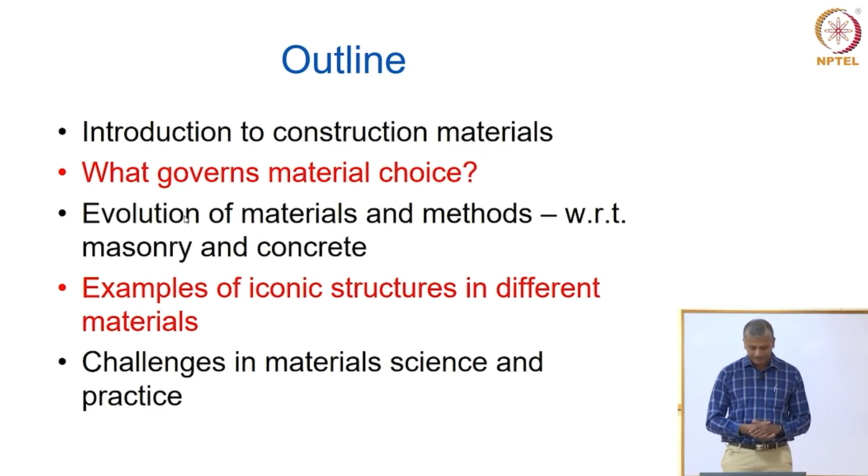There are several different types of civil engineering materials available today. Common ones being steel, concrete, asphalt, wood, polymers and plastics. You have other metals like aluminum and copper which are also used in construction. And today we are talking a lot about using composite materials, which was earlier used in aeronautical and mechanical engineering, but today we also use composite materials in civil engineering.

You've observed quite a bit that concrete apparently looks to be the material that is most widely used, right? In fact, it's the second most consumed material in the world. After what is the first most consumed material?

Soil, well, if you consider soil as a construction material, yes, we use a lot of soil in construction. But somebody said the right answer before. Water, yeah, water. Concrete is a material that is consumed in quantities second only to water.

Significantly large content of water is consumed for several things, including construction, but concrete is the second most consumed material. Apparently we are using about 25 billion tons of concrete every year, as per the last estimate. And it's only bound to go up because in countries like India, several African countries, and several other Asian countries, there's a lot more work that needs to be done regarding development of infrastructure, and that's where concrete is going to be used more and more.

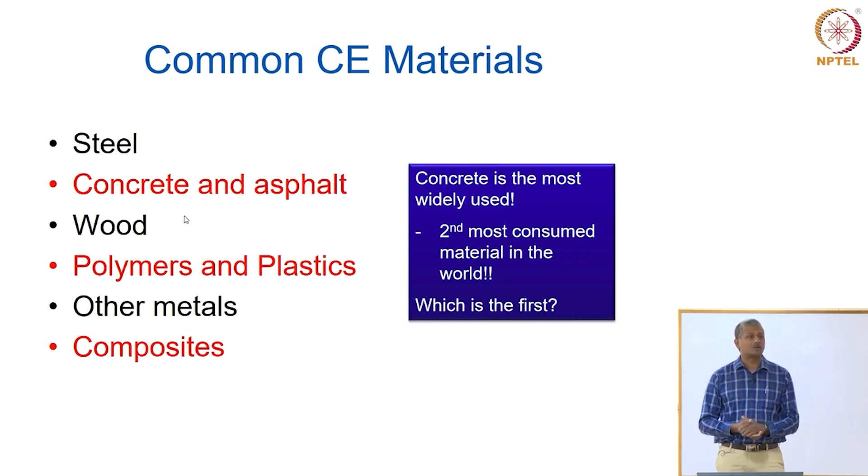So obviously there's a heavy burden that we are placing on the environment, and these are some of the aspects we'll look at towards the end when we look at the challenges as far as material study is concerned. For now, let's look at why we want to study materials. I mean, they are available, let's just use them, right? But there are several different aspects why we want to engage in a deeper understanding of material characteristics in order to make our construction more appropriate and more sustainable, more durable in the long term.

The idea is to improve the quality of existing materials and enhance the performance and service life. Later when you learn other aspects of engineering, you learn about service life being one of the controlling factors which governs the choice of a given material, construction product, or process. Service life essentially deals with how long the material or structure is able to withstand its given environment without losing the quality with which it is actually performing.

The other aspect is we always want to look for new materials, primarily looking at cost effectiveness and materials that are durable and long lasting. That's another aspect why we want to understand materials deeper from a scientific point of view.

Utilization of waste today is turning out to be quite a big challenge because we have to extensively dispose a lot of waste generated from different types of industries. In many cases, construction is a scenario where we can actually utilize many of these waste products, but not just by putting waste in the material and expecting it to perform—rather, a lot of this waste can actually end up being a value added resource to construction materials and projects.

Waste utilization is another aspect of why we want to study materials and understand their effect on existing construction materials. We also have ailing infrastructure that's getting old. We need to understand how materials degrade with time, so we can decide on appropriate strategies for repair and rehabilitation to prolong the service of these existing structures.

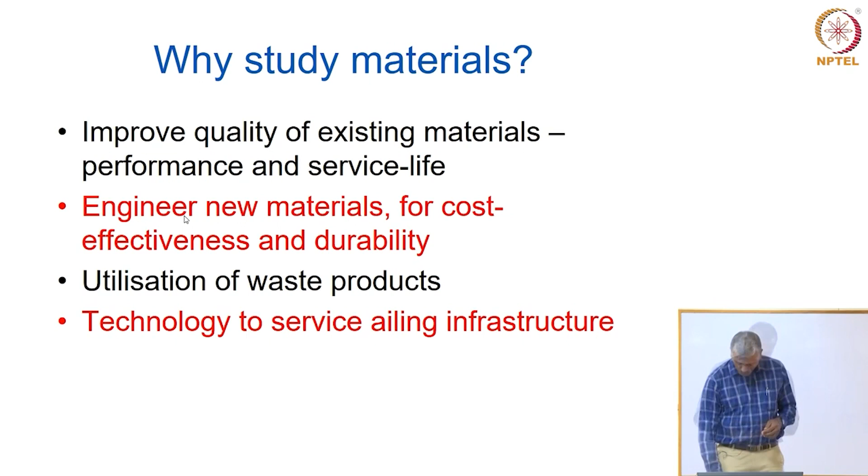There are several factors that govern or influence the choice of materials. First and foremost, depending on the type of application, what exactly you are constructing, what material is locally available and available at a cost-effective price. Cost should be low and the material should be available aplenty locally—that's probably the most important factor for choice of material.

Of course, in certain areas the climate will govern the choice of material. For example, in northern European countries where very little daylight is available most of the time, you could use glass as a major construction material because it allows in a lot more light. But unfortunately, in India we also started copying the Western use of glass, and most of our IT buildings and structures have come up with glass facades completely enveloping the building.

What is the problem with using glass in a climate like ours? It brings a lot more heat into the structure, and because of that we spend a lot more energy trying to air condition the buildings. So we're sort of losing the battle when we choose materials and technologies that aren't really apt for an environment. Climate is one of the deciding factors in choosing a particular material for a certain location.

The other aspect is the performance requirements—what exactly do we want this material to do, what kind of engineering characteristics are expected from this type of material. That is the performance requirement.

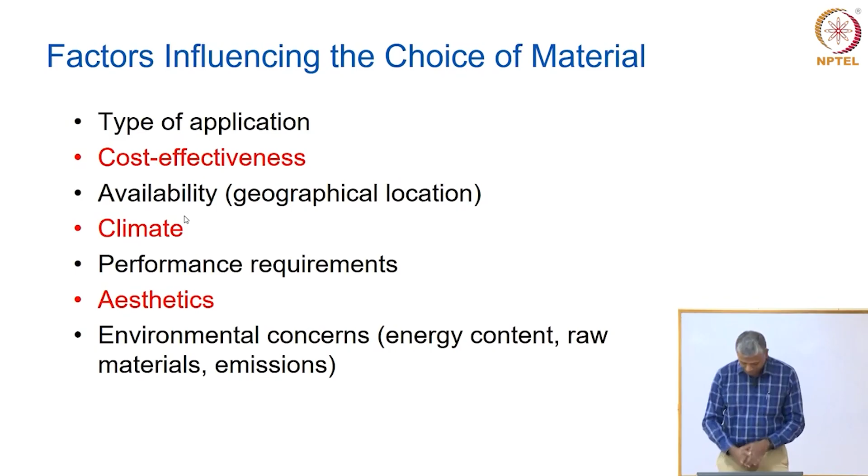So let us look at how materials and methods have evolved over the years. This is a historical process, though not probably entirely accurate in how I've depicted the different materials and processes. The idea was to give you a comprehensive glimpse of what types of construction materials and processes have actually been undertaken by engineers to build different structures.

We have monolithic construction, probably the oldest variety, where people simply built by carving rock. The caves are the earliest example of a dwelling as far as human civilization is concerned, and these caves were actually built into existing mountains by drilling and knocking things down, making a space for yourself inside—just to create a safe space for yourself.

Later on, people realized they had to work with smaller blocks of material so they could construct in a much grander fashion, because you can only do so much with monolithic construction—you can't really go beyond a certain scale. So they started looking at smaller blocks, assembling these blocks in various shapes and sizes, and that is what we call masonry.

Around the same time, wood was also quite prevalent in areas where good quality wood for construction was available, and wood as a construction material probably dates back as long as masonry has been used. Later on, we entered the era of concrete, and people started realizing that you could optimize further by combining different types of materials to give certain very interesting characteristics.

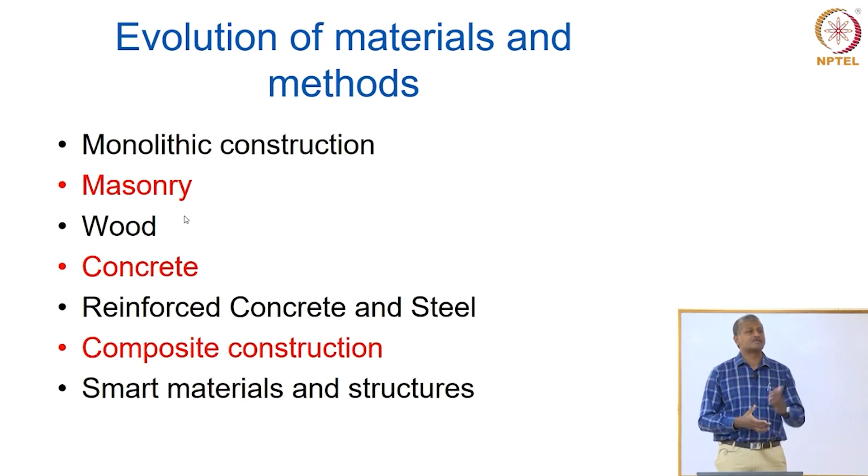All right, so some examples here of monolithic construction. This is all too familiar for you. The figure on the right, can anybody tell me where that's from?

It's from Hampi, as it says on the slide. It's basically a chariot which is carved out of a single rock. On the left you see another picture from Ellora, where again from a single rock you've carved out an entire temple.

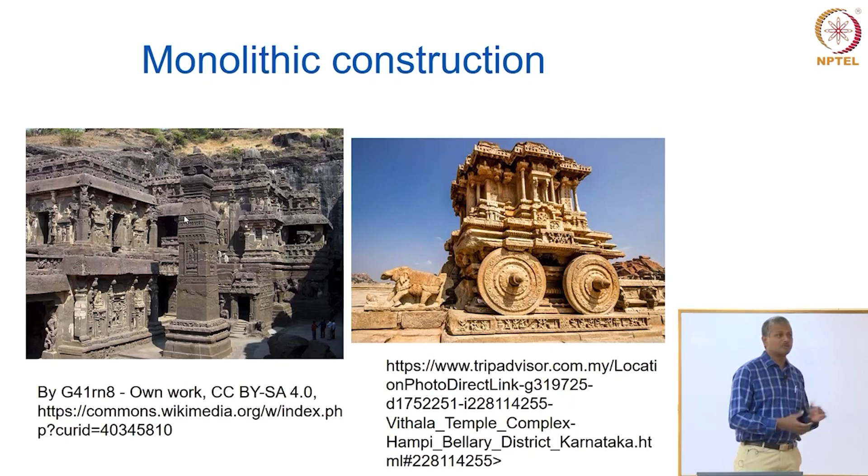As you move forward towards masonry, the simplest examples are the dry stacked masonry. You just take blocks and keep them on top of one another, and how is it stable? Because of gravity, because of sheer mass.

You use really massive components, and as you go to the top of the structure, you keep reducing their size. Like the Great Pyramids of Egypt, which are essentially dry stacked limestone blocks kept on top of each other, ultimately resulting in a massive structure that even today is a fairly significant landmark in the world.

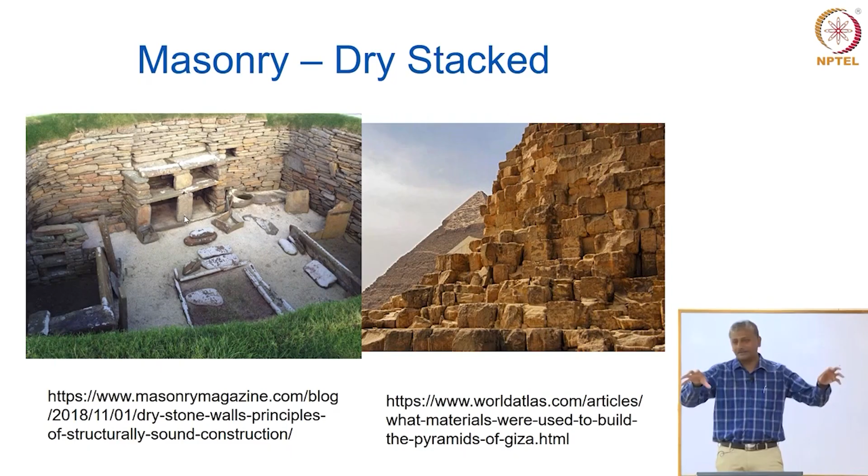But moving on, people thought this was not really the best way forward. Let's look at ways to join these blocks so we can work with smaller blocks that people can carry quite easily, and that's where jointed masonry started being practiced. Jointed masonry is even practiced today. The only thing changing in jointed masonry is the type of cementing material used to bind these blocks together.

In the past, there were several other examples of binding materials. I'll come to that part a little later. Today, of course, we only think of cement as the only possibility for joining masonry blocks.

So these are some examples. On the left, you have a brick masonry structure, and on the right, a stone masonry structure. Both have very fine detailing work done with the joints, giving a very nice appearance to the entire structure.

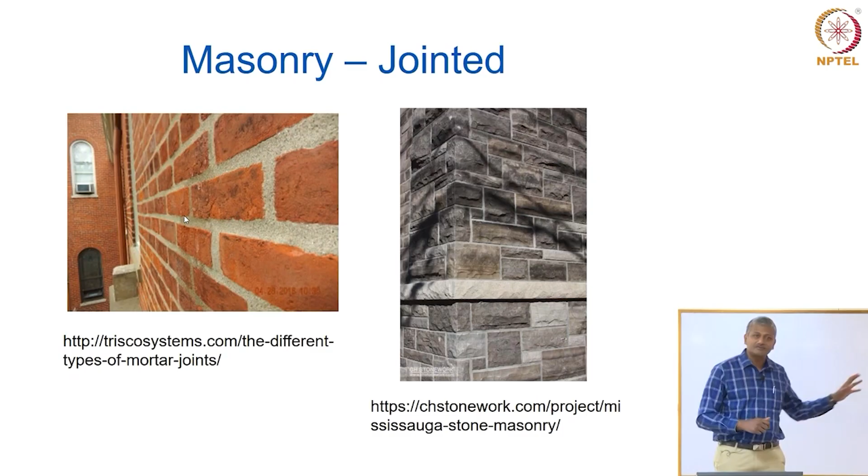Moving on from jointed masonry, you can actually get a lot more optimization with the speed of construction. Please remember, when doing a jointing process in a masonry block, you are placing one layer of masonry, then placing cement mortar or lime mortar on top, the binding material, then putting the next layer on.

But you can't keep doing this entire process in a single day. You need to wait for the material to harden, otherwise the wall will become unstable and fall. Because of that, the use of mortar for joining blocks is a process that actually slows down the construction work significantly.

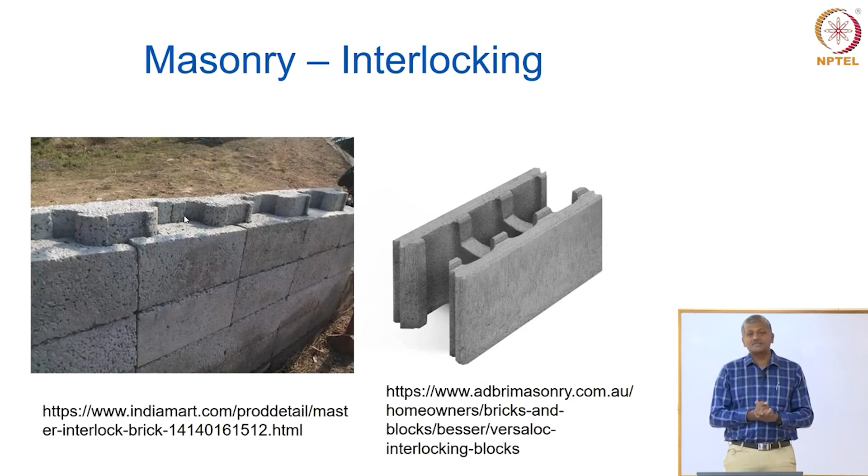The way around needing more mortar is to ensure good stability by providing interlocking between your blocks. This is something you know from childhood—like playing with Lego or other building blocks that connect because of their interlocking capabilities. Such interlocking blocks lead to construction that can be done much faster than jointed masonry.

From interlocking, people got the idea that you can strengthen masonry structures even better by putting reinforcement inside the structure. The need for providing additional strength to masonry comes in when we look at the performance of masonry in disaster events like earthquakes.

In earthquakes, the structure has a motion that moves along with the ground. In such cases, just having good strength in the axial direction isn't enough—you need some load carrying ability that can take loads in the lateral direction. Providing reinforcement can go a long way in extending the load carrying ability of your masonry, so reinforcements became the next step in the development of masonry structures.

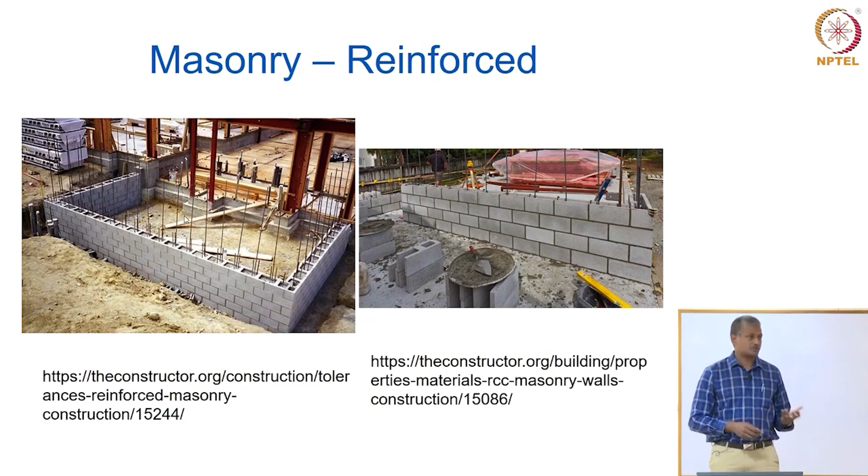This involved providing certain cavities within the masonry and putting a reinforcement rod, like the iron or steel rod typically used with concrete, to provide lateral resistance. Reinforced masonry was the next step forward from jointed and interlocking masonry. But coming back to jointed masonry, the primary reason people went for this was that they discovered combinations of materials with very good binding characteristics, which could join these masonry blocks together.

This binding characteristic is made possible by different cementing materials. In past structures of the Babylonians and Assyrians, a lot of burnt bricks and alabaster were cemented using bitumen. Today bitumen is used to pave roads, but the same material was earlier found in natural pools. You know the process of formation of bitumen, right?

It's formed from the distillation of petroleum or crude oil. You get several products like gasoline and kerosene, and what remains as residue is asphalt. This asphalt also occurs in naturally occurring pools around the world, and people were able to extract it and use it as a binder to bind masonry blocks together. So that became the first binding material used for masonry.

Later in Egypt, people started using burnt gypsum based cementing material—like plaster of Paris, which you may have used in school as a molding material. When you mix plaster of Paris with water, it hardens because it converts to gypsum. Plaster of Paris is calcium sulfate half H2O; when you add water, it becomes calcium sulfate 2H2O, causing it to harden. This was again a very popular binding material used in the past.

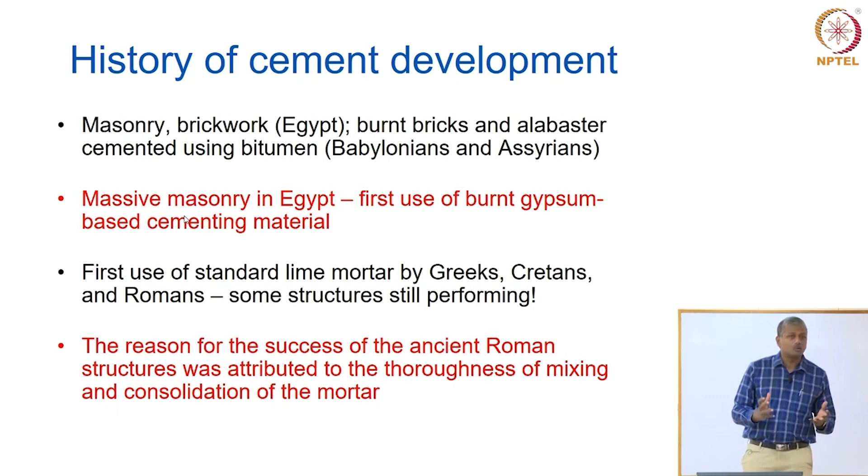In India also, there are several evidences from the past where lime was actually mixed with other additives like ground brick, for instance. The brick itself, when you grind it into a red powder, enhances the properties when you mix it to make the lime mortar. And that was one of the first uses of additive materials into the lime.

Later on in Greece and in Italy, they started using volcanic ash, and they saw that when you mix it with the lime, it gave much higher strength and durability properties. That is where the word pozzolana started coming into being, and even today when you buy cement, there is a brand called Portland Pozzolana cement. This pozzolana is basically anything which has a reactive silica content in it. The earliest example was the use of volcanic ash, and when you mix that with lime, it started producing a chemistry which was not seen with plain lime kind of structures.

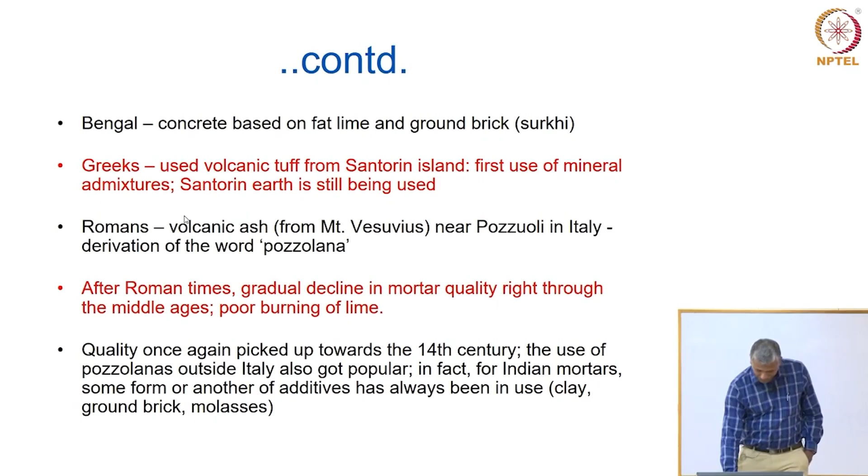Beyond that, there is not too much development that took place until about the 19th century, and the 19th century is when cement came into being. Cement basically has its origins probably much before the 19th century. We have great scientists, one of them Vicat, and Vicat is something that you will come across later when you actually do your lab class with cement, but that's not until the 5th semester. So basically Vicat essentially looked at some combination of limestone which had a lot of impurities in the form of clay in it, and he saw that when you burn this limestone and clay together, the resultant lime that you get is excellent with respect to its binding characteristics. But later people realized it's not lime that you're getting, you're actually getting something else, you're getting cement.

And the first person to realize this and understand the marketing potential was Joseph Aspdin. Although he was not the inventor per se of cement, what he did was, instead of calling it lime, he called it cement, and he gave it a special name called Portland cement. What he saw was, when this material obtained by mixing limestone and clay together reacts with water, it results in the formation of a hard rock-like substance, and this rock was similar in appearance to a type of limestone found in Dorset in the United Kingdom. So from that, Joseph Aspdin gave it the name Portland cement.

This Portland name got stuck with people, and people are still using it today, in spite of the patent having been obtained in 1824, and probably the patent went out 100 years ago maybe. The patent is no longer valid, but we still call the cement as Portland cement.

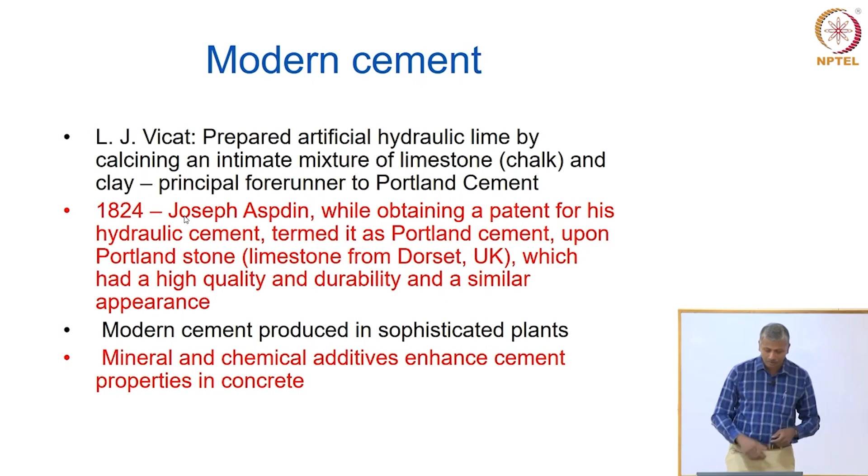Concrete as a material has been used for several years, thousands of years, but people didn't know it was called concrete earlier. Concrete is just an English word which means a mixture of different things. So we are mixing a binding material such as cement, water, sand, and stone to make the composite material called concrete.

Today we don't really have any other material which has the level of adaptability, cost effectiveness, and durability as concrete, which is why concrete is still highly popular, primarily because of cost effectiveness. You can't really build structures with the same level of load carrying ability at a reasonable cost.

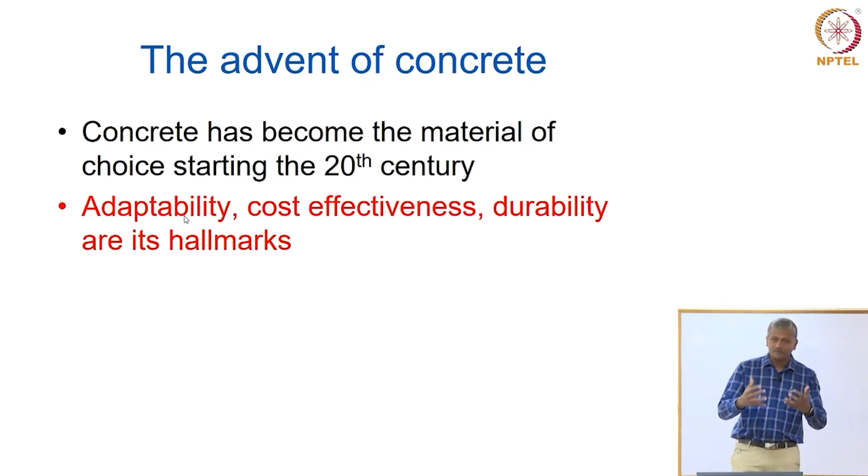But there are some limitations to building in plain concrete, because concrete as a material is excellent in compression but very poor in tension. Compression is when you are applying load onto the structure. Tension is when you are pulling the structure apart. Concrete is not very good in tension, so you need to strengthen it in tension.

That strengthening in tension basically involves either using reinforcement like steel, which is very good for tensile strength, or using structures where you can optimize the shape. In the past, people built with domes and arches. In such cases, you allow the load path so that only compression comes onto the material - there is no tension at all.

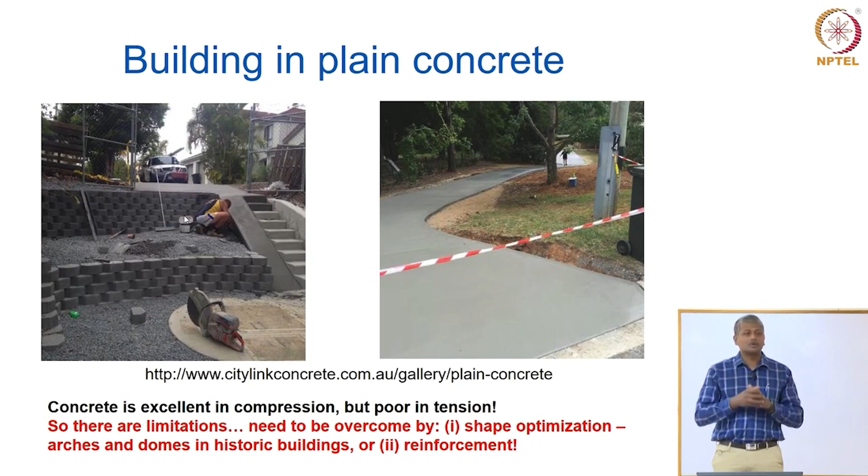For example, you may have seen pictures of these structures, the Pantheon Dome in Italy and St. Peter's Basilica in Vatican City, which have some form of lime concrete used to create these massive dome-shaped slab structures on top, with waffle-like openings to reduce overall weight, and even a circular opening in the center to allow light into the structure.

So these are concrete structures, but not the concrete that we know today. They did not use cement, because cement did not come into being until the 19th century. The Pantheon was built in the 2nd century, and St. Peter's Basilica in the 17th century. So they must have used lime with or without some additives to make the concrete, mixing lime with water, sand and stone.

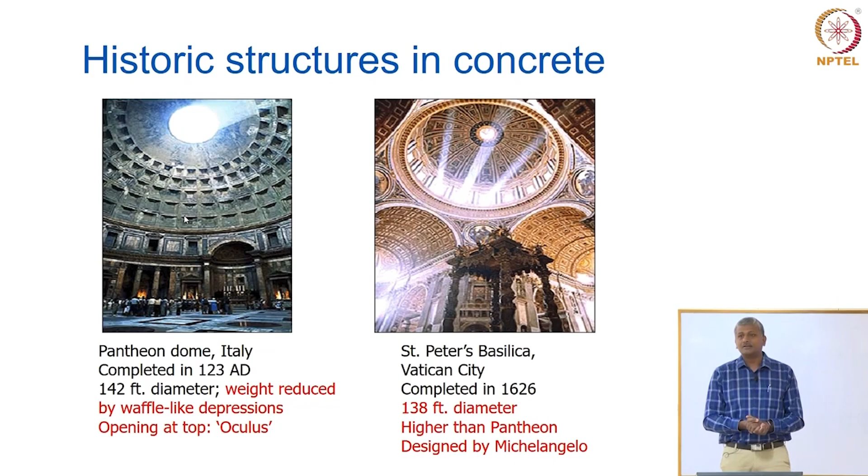With a dome or an arch, you do not really get any tension, you only have compression, so the material is able to withstand it easily. But when you go towards other forms, more rectangular forms that we're used to seeing in construction, you need to start putting steel to reinforce the concrete.

You only provide steel wherever the structure needs resistance against tensile loading. Where there is only compression, you do not have to worry about providing steel - you only provide steel where tension occurs in the reinforced concrete structure.

So reinforced concrete has given us a vast extent of possibilities which can define different types of shapes, different types of optimized uses and so on of the material combinations.

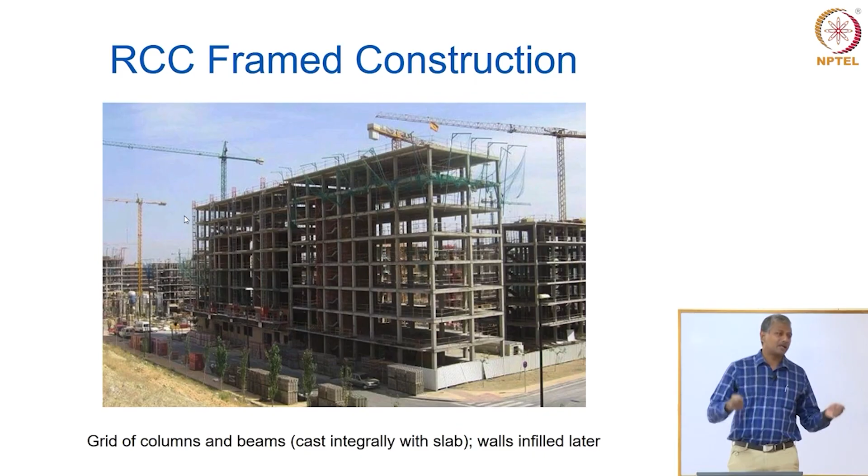But the only problem is, people realized that this is cutting down on productivity, because you make the frame, but the wall takes its own time in getting hardened and built up. So because of that, people started moving to the next stage, building walls also with solid concrete. This increased the speed at which construction could be done, because now you can have a formwork system around the entire structure. You just fill up your concrete, and as soon as some level of hardening happens, you lift up this formwork and build the next level.

This way you can go from floor to floor much faster. If you go to any of the high-rise residential buildings being constructed in the city, you will see that this is the system they adopt, where even the wall has the same concrete that goes into the column and the beam. So because now you don't need to worry about other materials, you just need to speed up your project by using the same material throughout the structure.

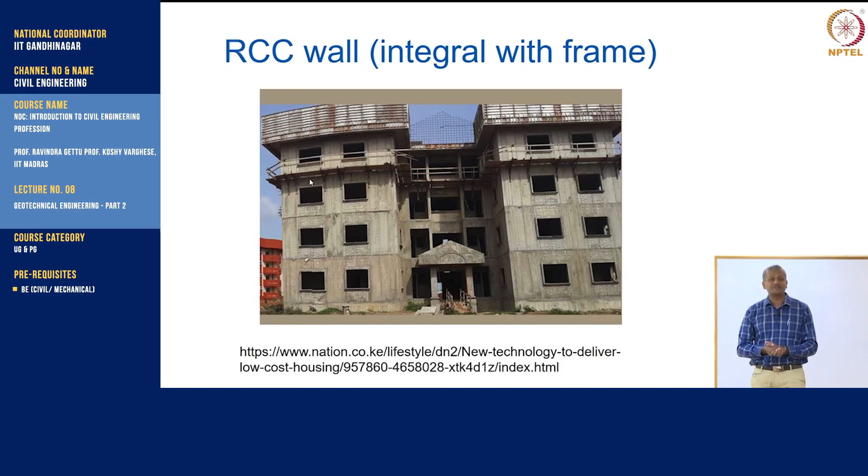Of course, there is a disadvantage here, your walls are not going to be as efficient anymore as before. Earlier, with the frame construction, you had the choice of choosing different types of materials for the wall, which could reduce the heat loading of the structure. But here, you are building everything in concrete, so it's probably not a great idea. But then, it speeds up the construction extensively, and you can now finish buildings in a matter of a few months, where earlier it would take more than a year, probably up to 2 years. The same level of building can be constructed in probably half the time.

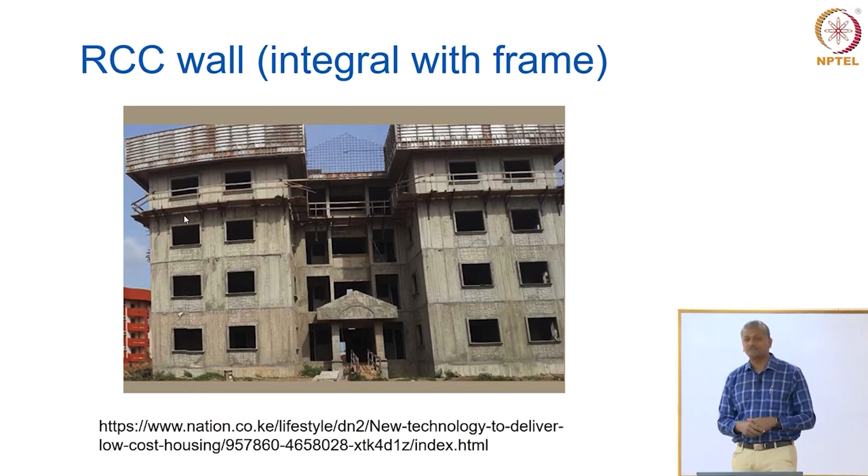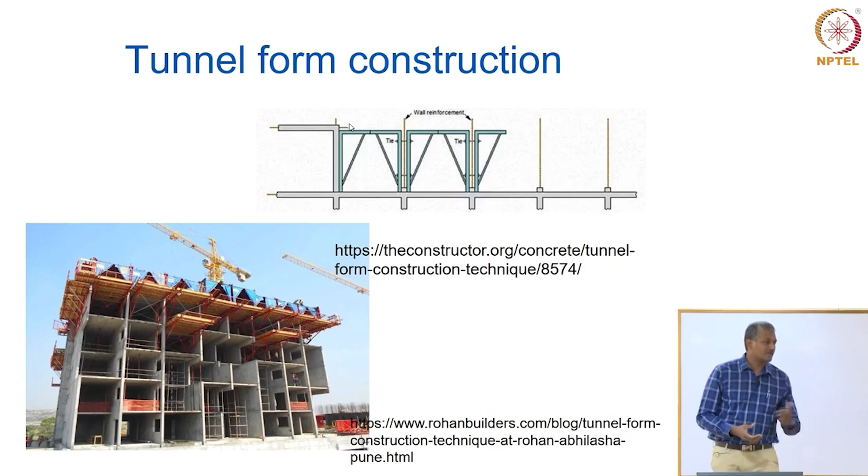Now, when you slow down your process because you need to marry steel and concrete, what you can also do is look for methodologies by which you can strengthen the concrete itself and make it respond positively against tensile loads too. This has been accomplished by the use of pre-stressed concrete. You'll learn later about what pre-stressing is and how it increases the load carrying capacity of concrete. But overall, this pre-stressed concrete belongs to a segment of concrete called precast concrete.

What is precasting? That means without really assembling or shaping the concrete on the site, I make the components of concrete in a factory, bring them to the site, and simply stitch them together. That's called precast concrete.

The obvious advantage of precast construction is that I can control the quality a lot better. I'm factory making these components. On site, there are so many different people who can actually spoil the appearance, and the workmen need not be well trained, which could spoil the final appearance of the structure. But I don't have that issue with a precast structure, where components are built at the factory, then brought to the site and simply assembled, stacked up, and connected properly.

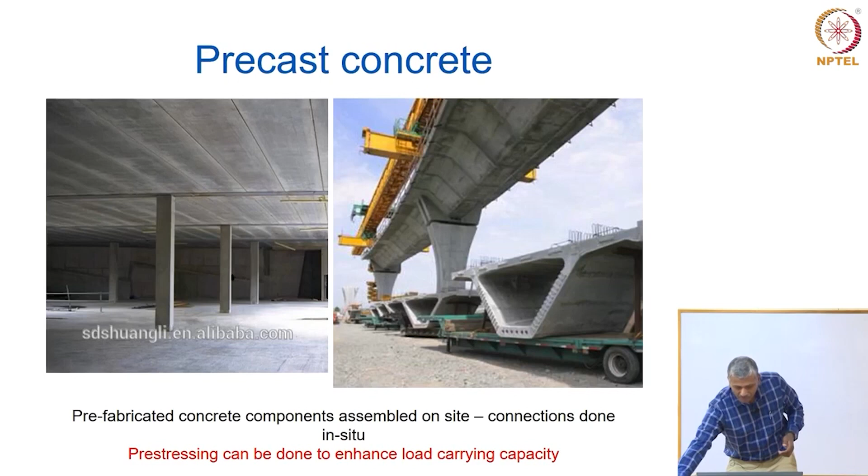What is the advantage here? In the past, when you had to make something with concrete, you had to put up formwork, as I showed you in one of the previous pictures—this formwork that you have on the side.

It is estimated that formwork takes up nearly 20 to 30% of the cost of construction, and nearly 60% of the time it takes to build a concrete structure. Why does it take so long? Because it has to be assembled, and after the concrete hardens, it needs to be disassembled. That time can really eat into the productivity of your entire project.

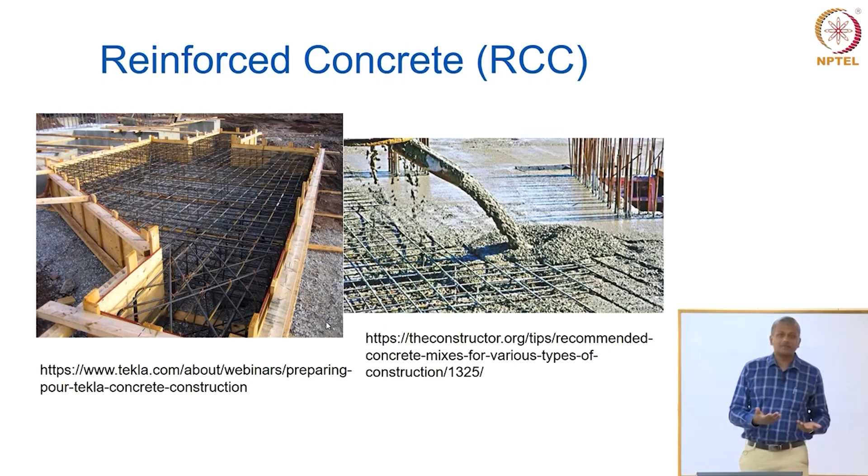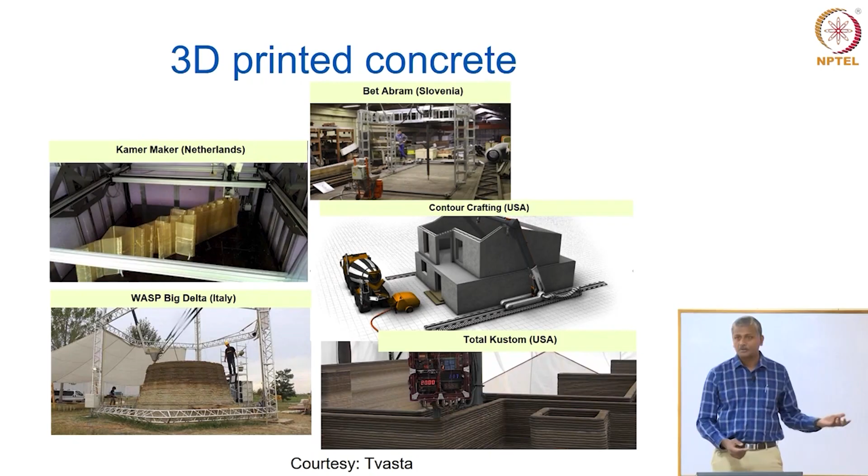So that's where people think 3D printing can provide a means of much faster construction. There are several attempts around the world where people have looked at 3D printing, and there are some commercial successes too. People have produced smaller scale buildings and hotels with this. There's one example of a Chinese company which does this 3D printing.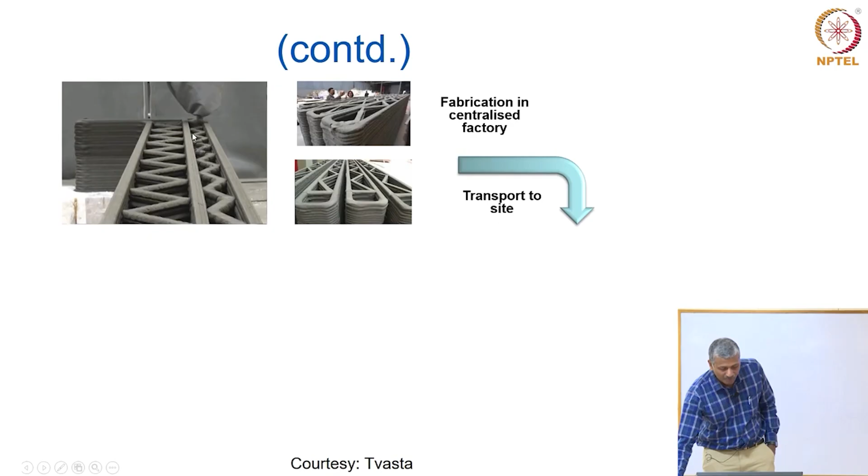They prefabricate 3D printed components in the factory. You can see how the arm of this printer moves and deposits concrete layer by layer, and that's the finished structure. Each wall is finished and transported to site where it's simply connected together. The question is, what's the advantage of doing this when you can as well do precasting in the factory and connect on site? Again, the advantage is when you do precast, you still have to use formwork. Here you are totally avoiding the use of formwork.

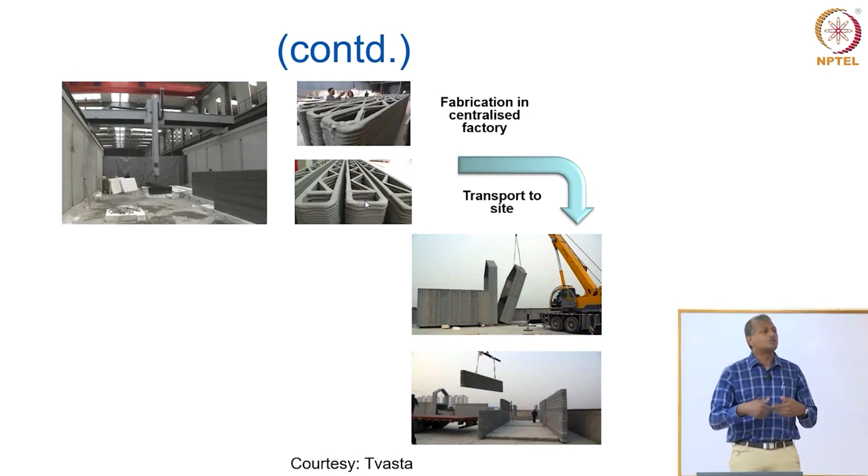Of course, at IIT Madras we have also done significant work on 3D printing. If you have visited the ground floor of the BSB, you can see India's first 3D printed concrete structure, which is basically a modular 3D print. We did modules of 30 centimeters and connected them using mortar. It's almost like connecting blocks, but with the printer we had, seen on the left, we could not build modules larger than 30 centimeters, so we had to build 30 centimeter modules and then connect them.

Now we are producing another structure which is much larger than this and which can be printed almost up to a height of 1.5 meters without the need for connecting modules. There's a lot more possibilities in this realm, and by the time you guys finish your bachelor's degree, there will be a lot more construction around the world accomplished by 3D printing of concrete.

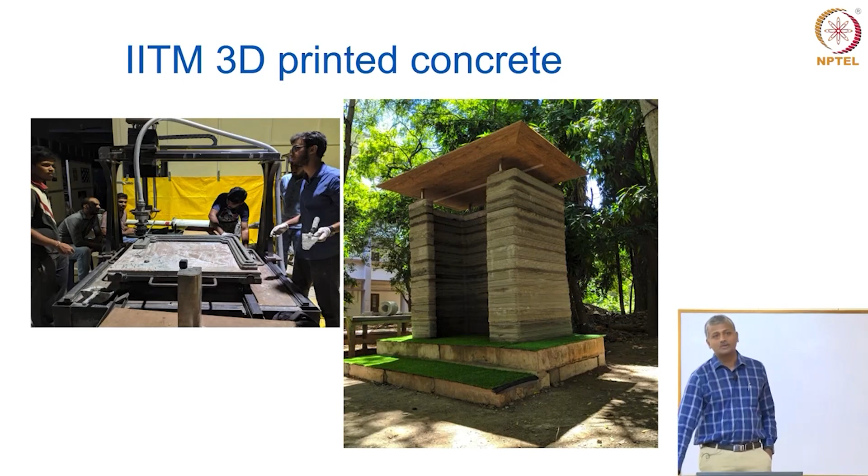I'll show you very quickly some iconic structures which show why these materials have been very popular. Wood obviously has been a popular construction material. It's got excellent tensile properties, and because of that it's extremely efficient as a building material. If you go to Western countries like the US or Canada, you'll often see people walk into large stores and buy their own wood and construct their own house themselves, because wood can be shaped and jointed quite easily.

If you've learned the basics of carpentry, the joints are quite strong. Wood is excellent in tension, because of which you don't really need very sophisticated engineering to do wooden houses. So wood is still a highly preferred material of construction in those countries. The only problem is moisture, fire resistance, and biological growth are some issues which can bring down the life of the wooden structure.

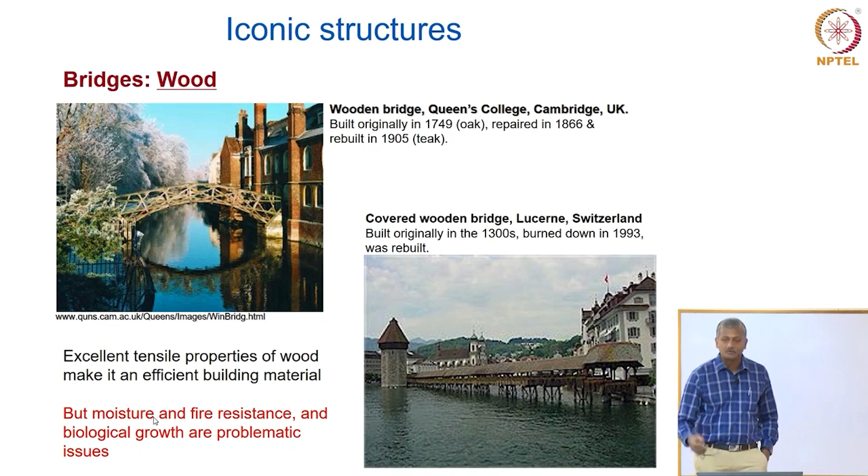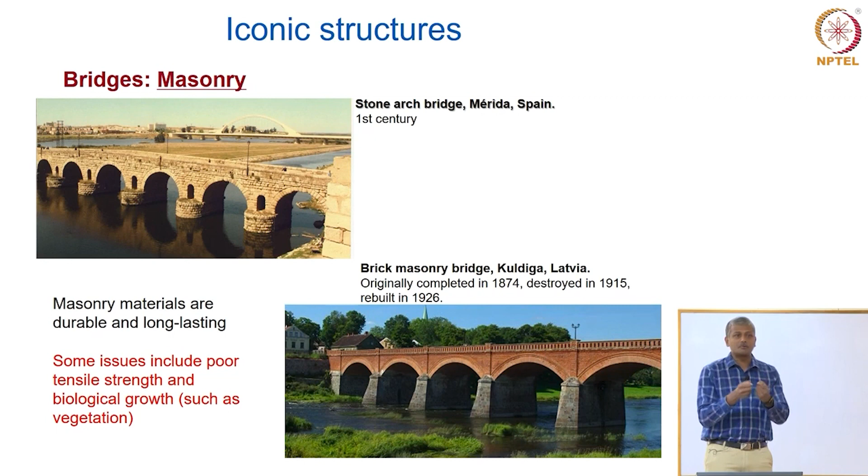Then you have masonry, which is commonly seen in many of our bridges. You see some examples of excellent masonry bridges from Europe. Of course, with masonry, poor tensile strength could be a factor affecting usage, along with biological growth. You would have seen in many masonry structures even plants and trees growing through the structure, because you have porous mortar filling the space between bricks, and the brick itself is basically derived from soil. So if it absorbs moisture, biological growth can take place within the brick also.

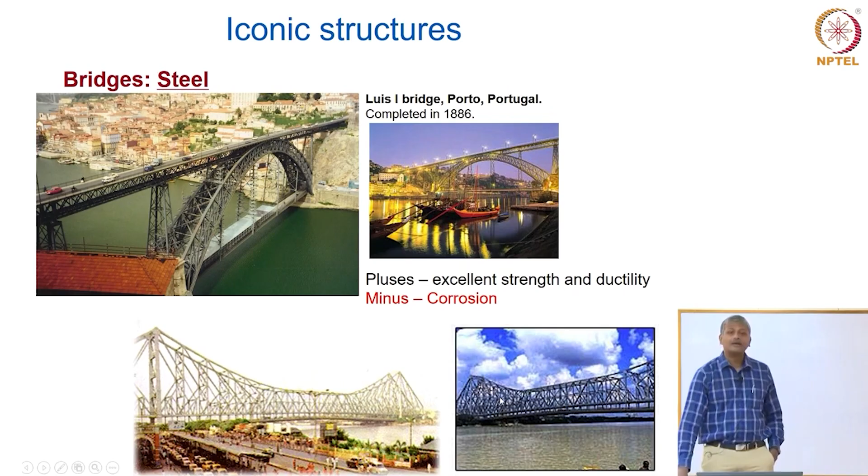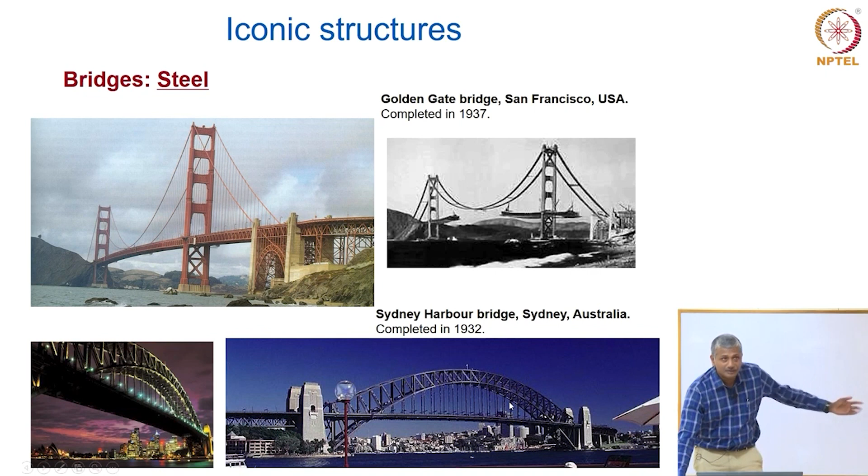Bridges in steel - most of our railway bridges are in steel, but a lot of iconic bridges around the world are in steel too. One iconic bridge as far as India is concerned is the Howrah Bridge in Calcutta, a very popular bridge. The bridge on the top left is the Golden Gate Bridge in San Francisco, another popular iconic bridge. And you have the Sydney Harbour Bridge on the bottom right - you see it every time during New Year's when they put up the firecrackers.

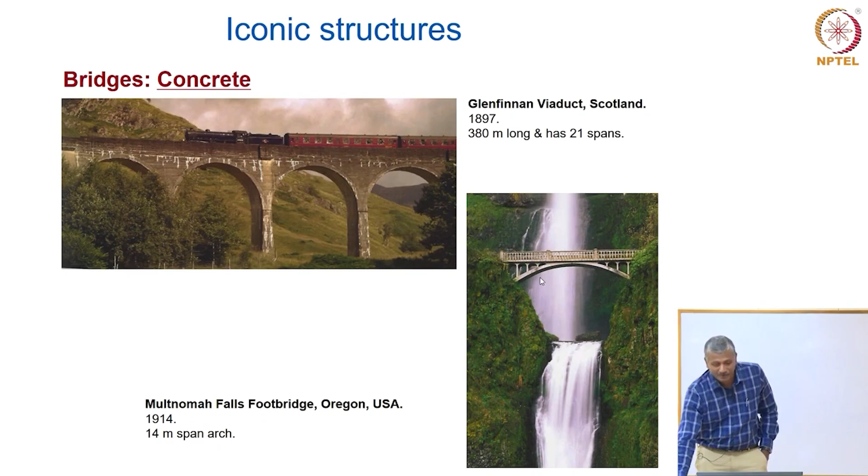You can see the kind of difficulties they must have had in actually assembling this kind of structure in that place. Then you have, of course, the Confederation Bridge in Canada, and the Great Belt Bridge in Denmark-Sweden, which is actually an extensively long bridge.

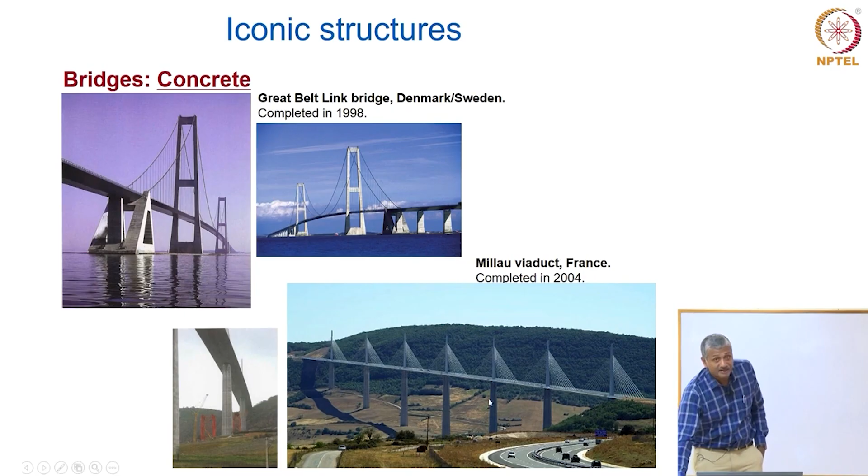It also converts into a tunnel in between. So the road basically goes on a bridge, gets into the tunnel, and then comes out again in a bridge. The Millau Viaduct in France is again a very popular structure that people often put in their presentations. Again, this is more bridges from the US.

Composite bridges—composites basically ensure that we can get the best out of two different materials by utilizing their strengths. For example, if we combine concrete and steel, concrete is good in compression, steel is good in tension. So you provide reinforced concrete, which is an excellent composite material.

But now we are not just stopping there, we are also using other materials like fiber reinforced materials. Fibers basically provide, at a very small scale, excellent tensile resistance, and because of this, fiber reinforced structures have a much better potential of resisting dynamic loading like earthquakes, and also perform a lot better than non-fiber reinforced structures. For example, here is a stormwater channel bridge in the US.

You can see here a glass fiber reinforced polymer deck which is used to actually construct this bridge. And these are basically shells of carbon fiber which are then filled with lightweight concrete to be used as girder. So the concrete strength there does not really matter as much because the carbon fiber provides excellent strength in the direction of bending, and the concrete simply envelopes this fiber and ensures a proper matrix is made.

What is a naturally occurring composite structure that you are familiar with? Naturally occurring composite structure... Wood. Wood is a naturally existing composite structure.

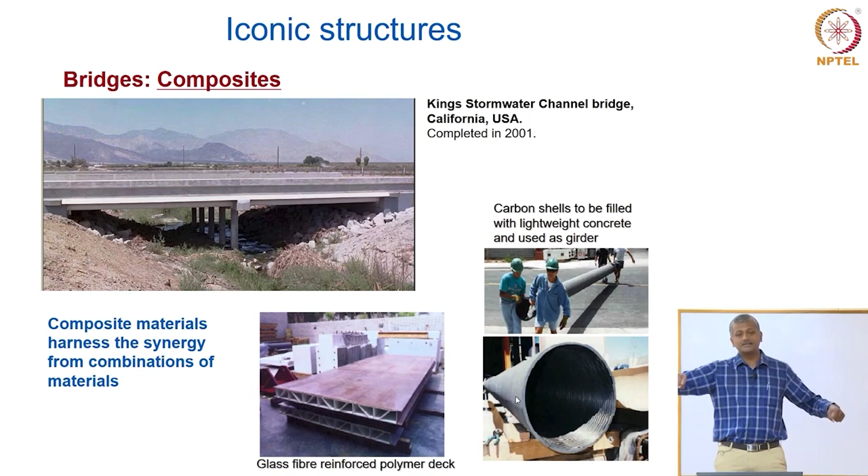Why do I say it's a composite structure? If you look in the structure of wood, you have the fibrils of cellulose which are embedded in a matrix of lignin. So along the direction of the fibers, when you try to stretch wood, it has excellent tensile characteristics. So wood is a naturally existing composite structure.

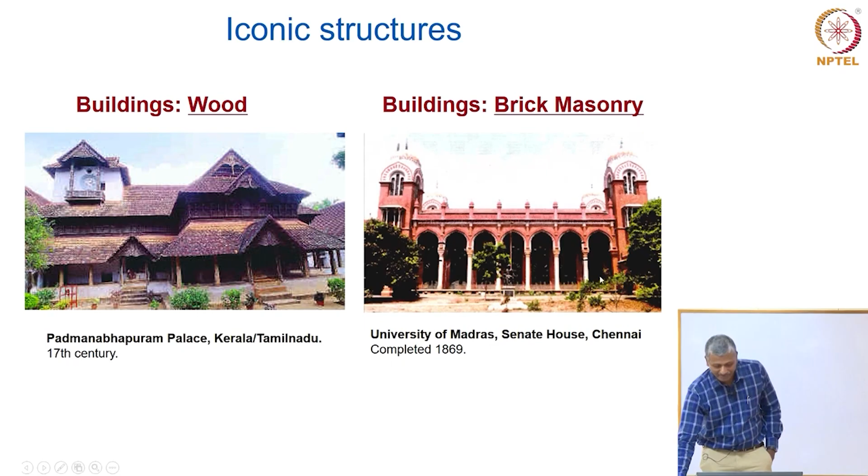Of course, wood has been used in several iconic buildings in India also, like the Padmanabhapuram Palace in Kerala, and brick masonry is of course all over the place, especially with our heritage monuments that you see in Chennai. A lot of brick masonry is used. And stone masonry—the best example is of course the Qutab Minar.

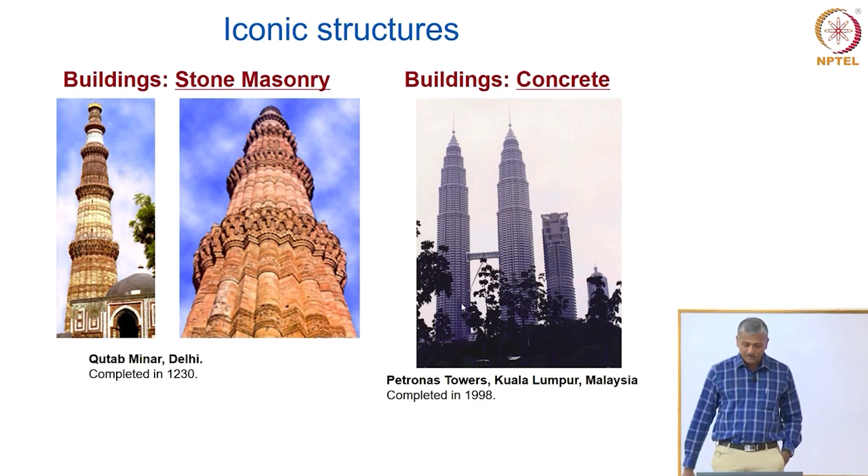With concrete you have several examples around the world like the Petronas Twin Towers. Another interesting example obviously is the Burj Khalifa. Burj Khalifa is not entirely concrete—the first 600 meters is in concrete, the remaining 200-plus meters is in steel.

And the interesting facet about this is that the 600 meters of concrete costs less than the 200 meters of steel. The 200 meters of steel on top has no purpose with respect to people. The 600 meters of concrete is where all the people are, because up to 100 and something stories you have people until that level.

This also has a very interesting record with respect to concrete technology—this is the highest level to which concrete was pumped from the ground. So concrete was mixed at the ground and pumped all the way up to 600 meters and delivered for the construction of the highest level of concrete in this building.

But what happens when you start constructing these tall buildings? What is a governing factor? Is it the strength or the stability? Stability against wind, yeah, lateral loads. When you start constructing tall, you need to start thinking about designing against lateral loads—not just wind, even earthquake for instance—you need to have essentially components of design built in which can take care of these loads.

Another interesting aspect about Burj Khalifa: it came much after the downing of the Twin Towers in New York by Osama bin Laden. What happened there? Those structures were made with what material? Steel. Those were steel framed structures, right?

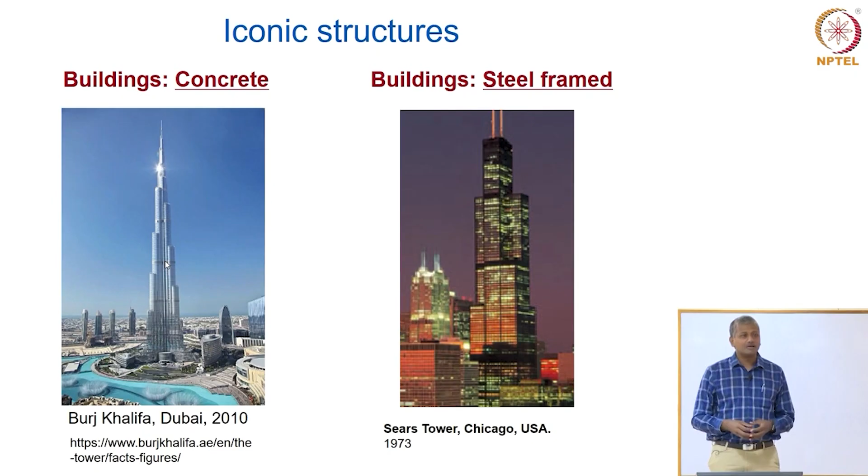So we adapt, we learn from our past problems. Of course, nobody could have thought about an airline crashing into a building. That's something totally unthinkable. Nobody designs for that.

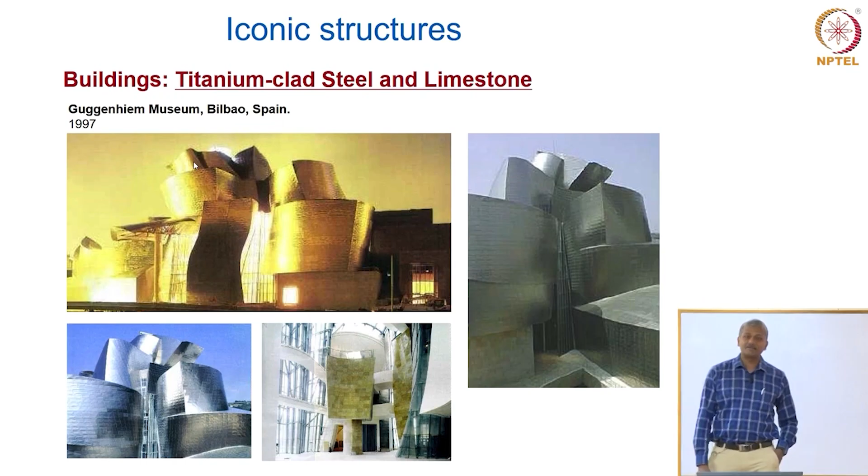But nevertheless, we adapt and learn from our past to build something different. Today, a lot of glass is also used in structures, so glass and steel are popular choices for high profile structures. Even the Guggenheim Museum in Bilbao, Spain, is titanium clad steel and limestone combined to give this very interesting appearance.

And of course, dams in concrete - you see several hundreds of them all across the world. So where are we going from here? We have looked at how materials and construction practices evolved, how different materials led to various types of performance and functional characteristics, and how we were limited by the characteristics of one material, overcoming that by choosing combinations with other materials. So what are the challenges for the future?

One primary challenge is that our resources are going down. We have dwindling resources, especially cement, the most commonly used binding material in the world. Manufacture of cement utilizes vast quantities of limestone from around the world, and it's estimated that if we continue producing cement at the same rate, we will run out of those limestone reserves in probably 50 to 100 years. That means there won't be any cement beyond that.

So people have started looking at alternatives to cement and concrete. Alternative materials are something we need to wake up to and start thinking about utilizing as much as possible.

In most cases, construction materials are highly heterogeneous - I'm primarily talking here about concrete, the most commonly used construction material. This heterogeneity leads to accompanying unpredictability. We can't really model these materials well enough, and because of that, we can't predict how long they'll withstand a particular set of loading and environmental conditions.

Steel, on the other hand, we understand much better because it behaves in a very specific fashion. Steel components are factory produced; when they come to site, all you need to do is connect them. The characteristics of steel are governed by how it's produced in the factory. Concrete, on the other hand, a lot of it is applied or directly made on site, and because of that, a lot of variability is introduced into the formulation of concrete.

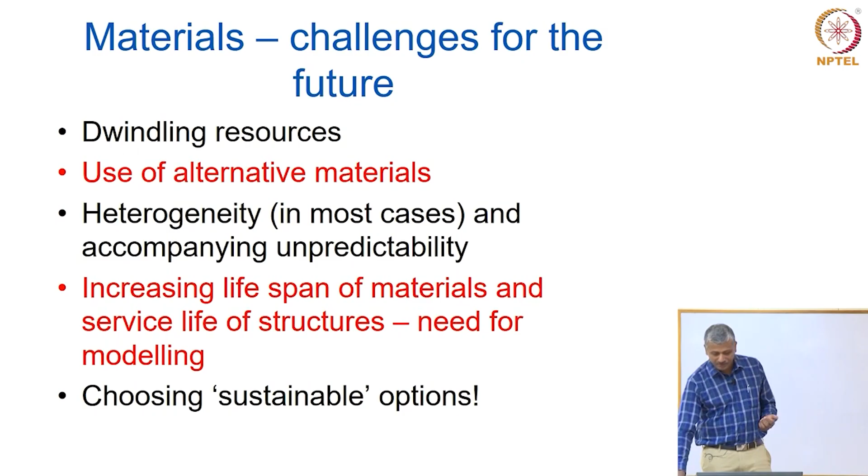So tomorrow, when you become engineers, you'll start hearing these terms more often: carbon credits is one term you'll hear quite often, along with green rating, embodied energy, life cycle assessment. It's no longer just going to be strength, durability, workability - you'll start thinking about how to design technology so that your carbon credits are obtained, reduce the embodied energy in the structure, get a green rating for your building, and have numbers with respect to life cycle assessment.

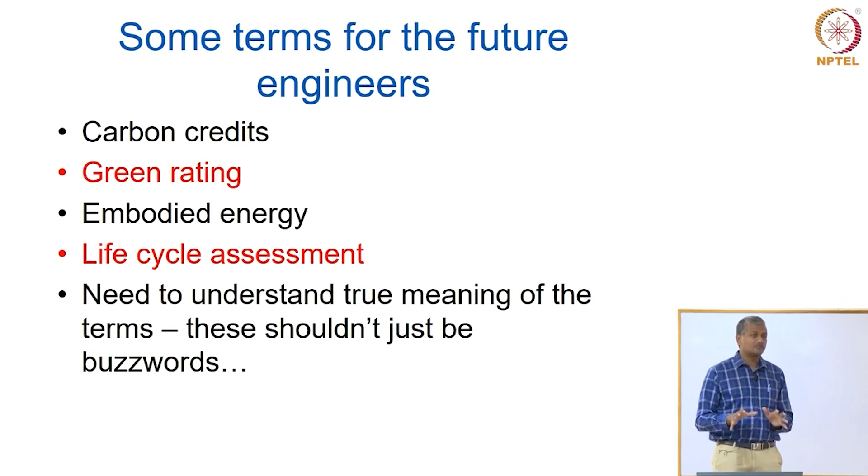These cannot be just buzzwords - you need to get the true meaning of these to really implement them in construction. So with that, I'd like to end by saying we are at a very exciting stage with respect to the kind of applications we have with conventional materials, and with new materials coming in which can strengthen our understanding of existing construction technologies.

People used to mock civil engineering and call it a brick and mortar profession, but the vast variety of materials and construction processes we use clearly shows that civil engineering is no longer a brick and mortar profession.